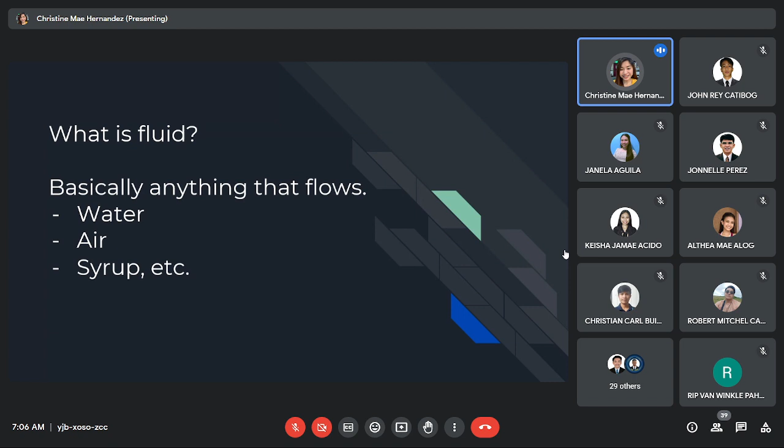Okay, so let's start with the basics before we jump to pumps. So we need to know what fluids really are. So what is fluid again? Basically, anything that flows - water, air, syrup, etc. Or it can be air mixtures. So a fluid is liquid or gas or other material that flows or continuously deforms under a shear or tangential force. So it is divided into liquid and gases.

Liquid is hard to compress as it follows the shape of its container with an upper free surface. But gas is easy to compress as it allows to expand to fill its container where there is no free surface. So fluids are also used to reduce friction.

So in Bernoulli's equation, we have friction head loss, so fluids reduce the friction too. So the study of fluid that is in motion is called fluid dynamics, and fluid at rest is called fluid static. So in order to completely study fluids in motion or at rest, one needs to study various basic concepts or fluid properties.

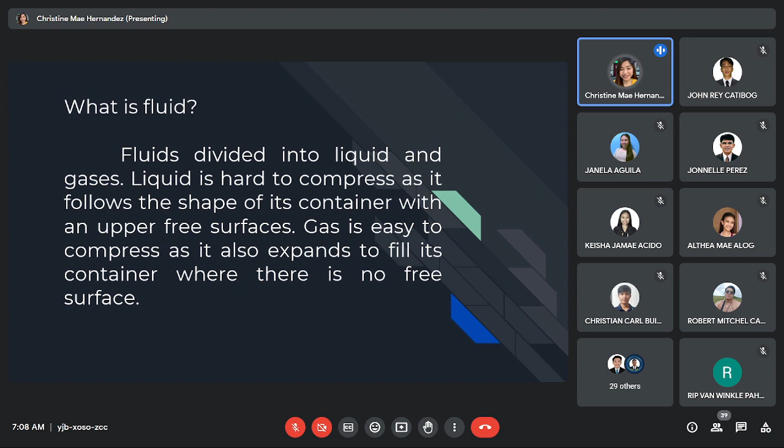So this is what we'll discuss first before we jump to pumps or fluid machineries. So characteristics of fluids can be compressibility, density, pressure, buoyancy, and viscosity.

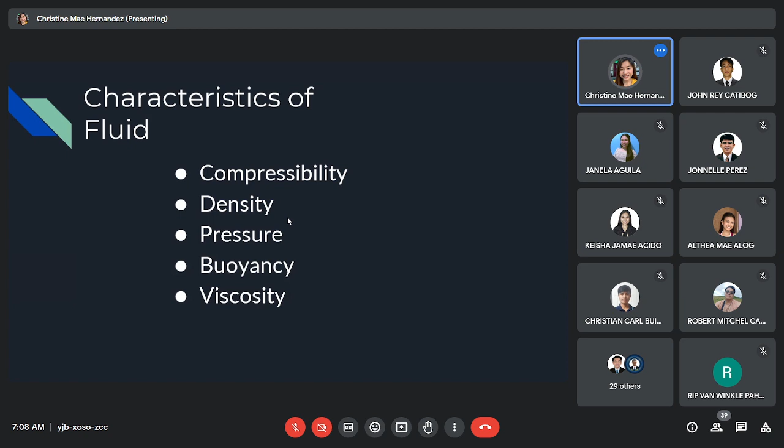So compressibility - applying pressure to a fluid in order to put greater mass into a smaller container. So gases and liquids vary in this characteristic. Gas is more compressible than liquid. So some liquids are considered incompressible.

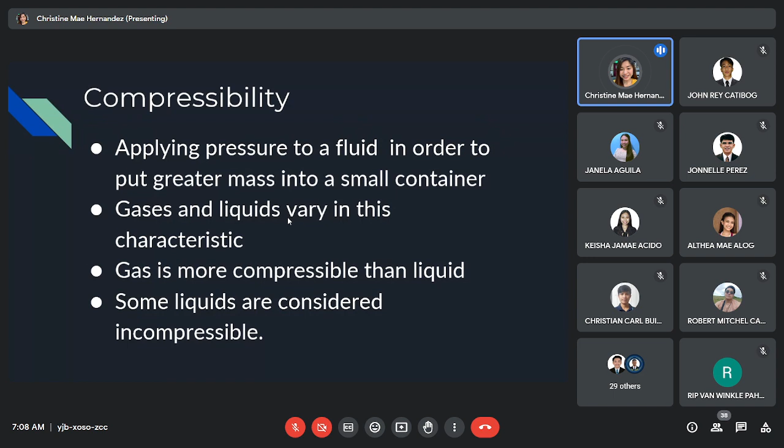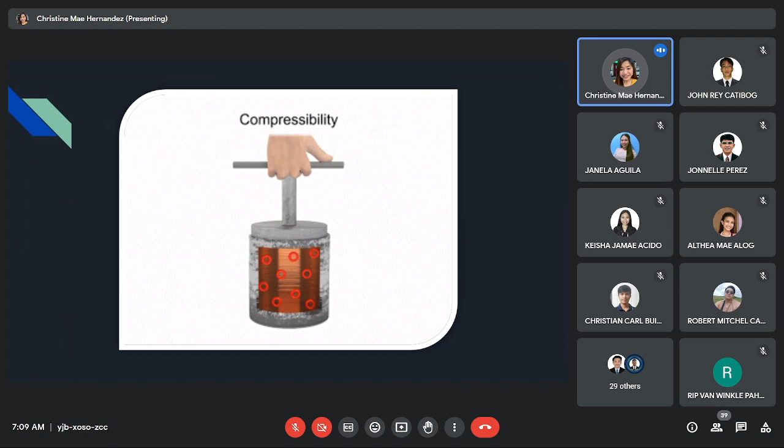So compressibility gives an idea of how a fluid volume changes when subjected to a change in pressure or external force. So this is the example or GIF of compressibility. You can see the fluid particles - at first they are far apart. Then once you put an external force, the fluid becomes compressed. So in simple words, compressibility is the measure of change in the volume of fluid under the effect of force or pressure or stress.

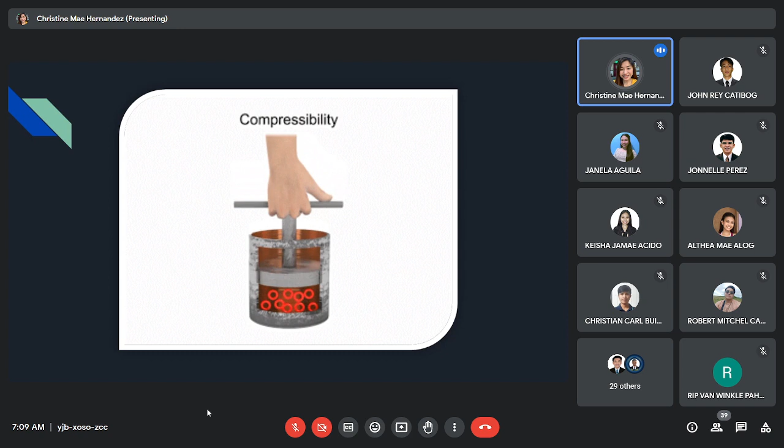So next one is density. Density is a very common and important property of matter. For a liquid, density is defined as mass contained in a unit volume. The more precise name for density is volumetric mass density. So here, the terms for density can differ.

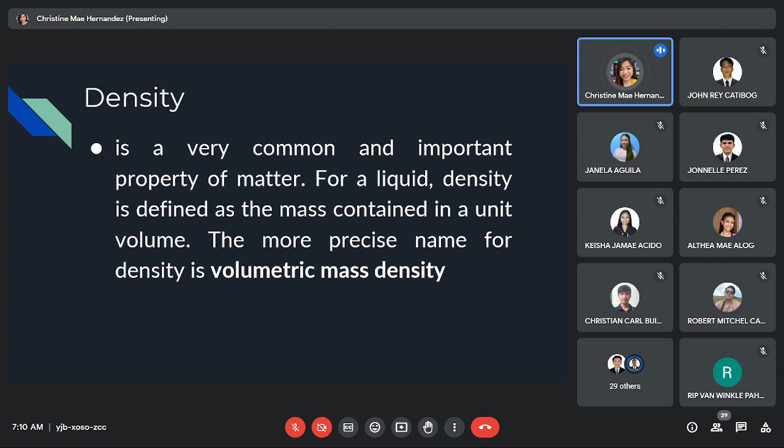So for SI unit, don't get confused. For SI unit it's kilogram per cubic meter, and for English unit it's slug per cubic feet. So are you okay with the conversions, SI or English units, or are you having a hard time with those?

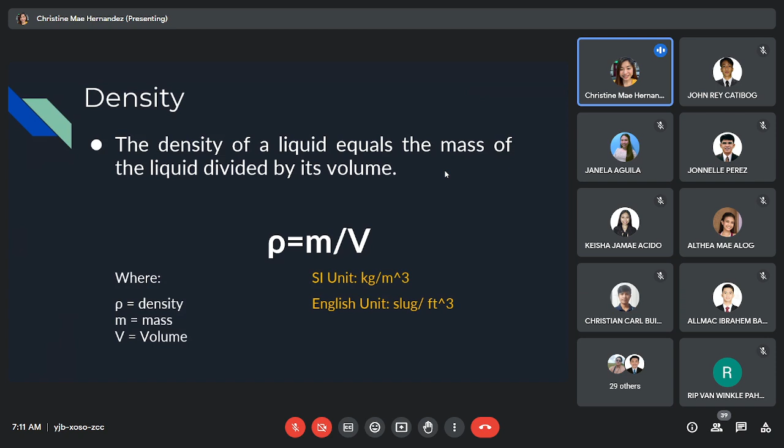Next, pressure. Fluid pressure is a measurement of the force per unit area on an object in the fluid or on the surface of a closed container. This pressure can be caused by gravity, acceleration, or by forces outside a closed container. Since a fluid has no definite shape, its pressure applies in all directions.

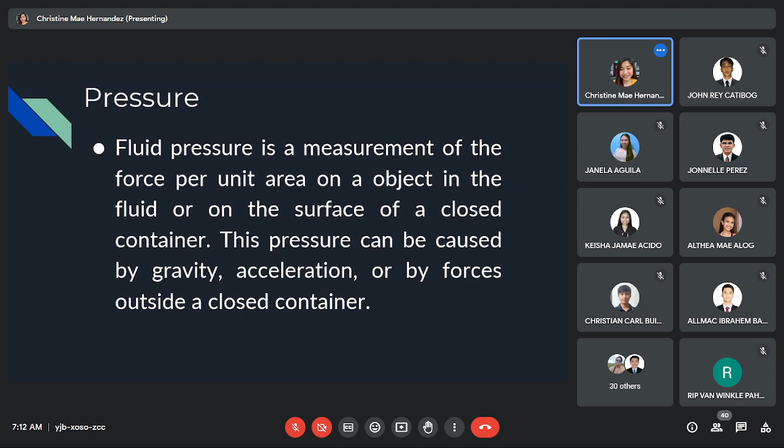So later we'll prove Pascal's law - whether it's true that pressure is equal in all directions. So fluid pressure can also be amplified through hydraulic mechanisms and change in the velocity of the fluid. Pressure is defined as force divided by the area on which the force is pushing. So the basic formula is pressure equals force over area.

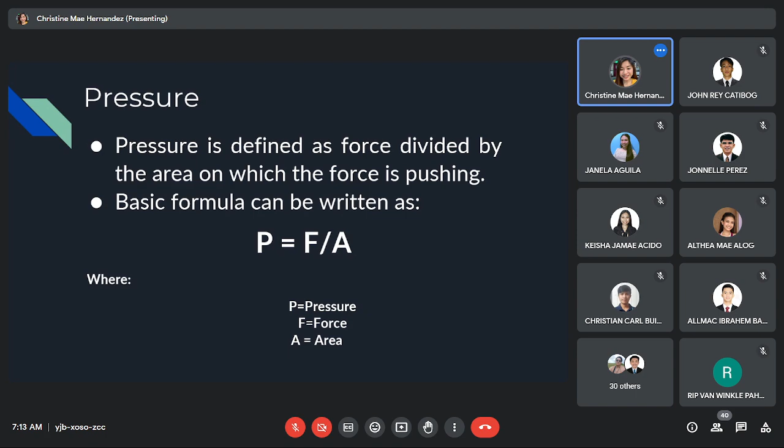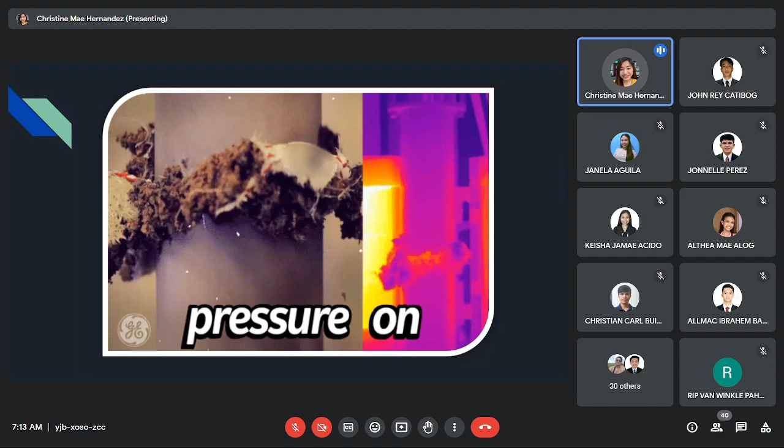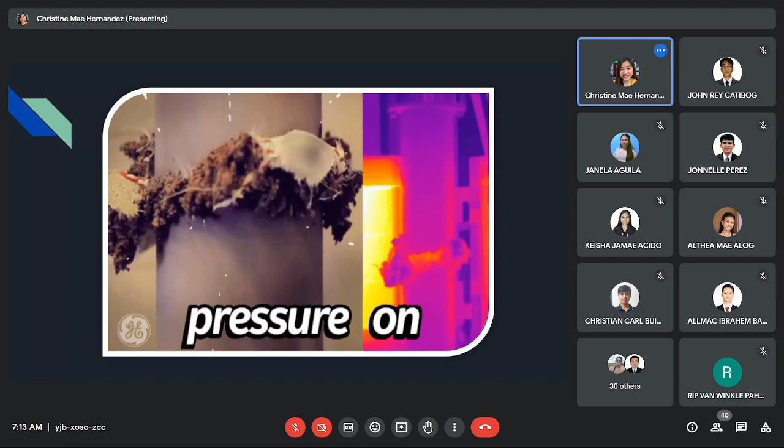So regarding pressure, when you go swimming, the pressure is higher at the bottom of the pool or the ocean than at the water surface. That's why our ears hurt, our heads, and your head feels like it's about to explode, because the deeper you go, the more fluid there is above you with its weight pressing you down.

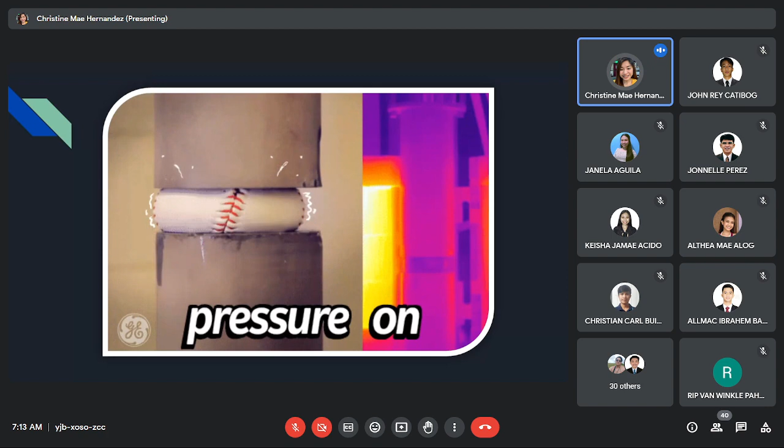A manometer is a device used to measure pressure. A common and simple manometer consists of a U-shaped tube of glass filled with some liquid. The typical liquid used is mercury, because of its high density.

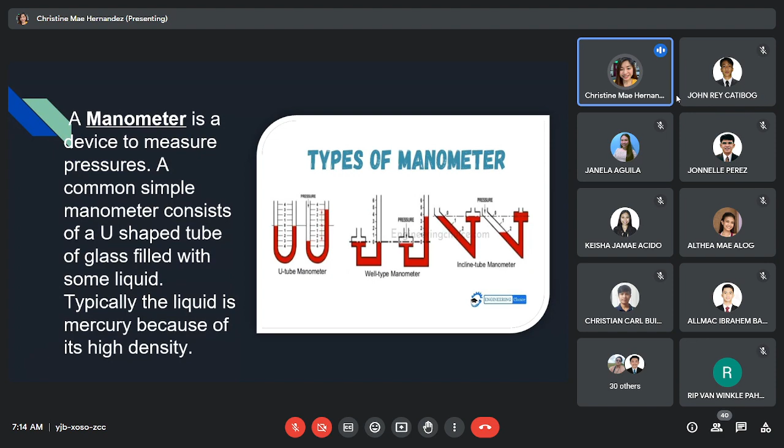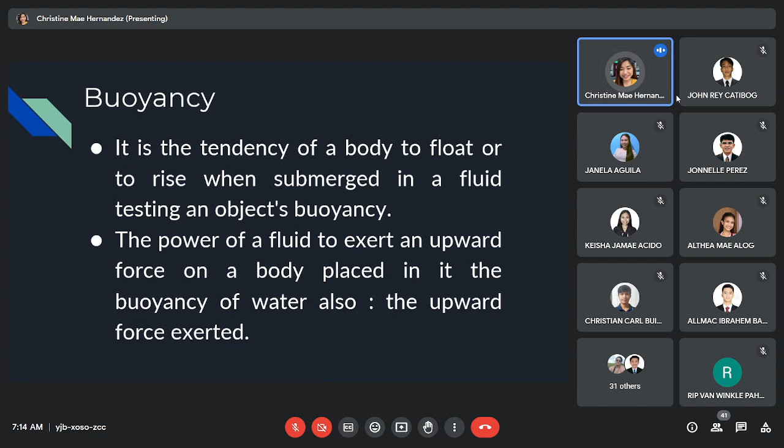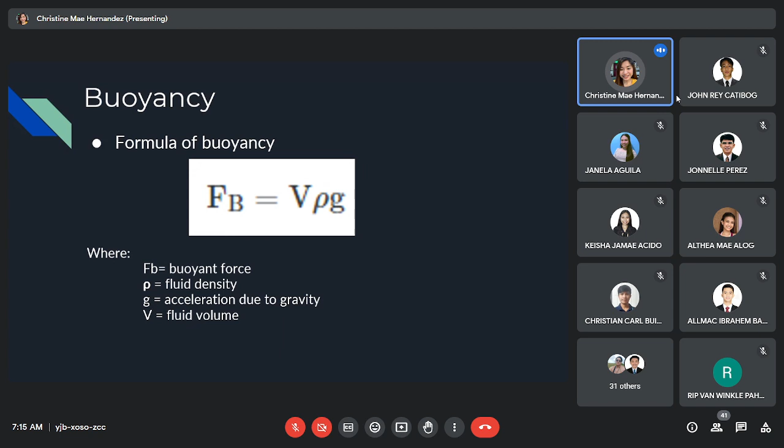The formula for buoyancy: FB, or buoyant force, is equal to fluid volume times the fluid density times the gravitational acceleration. An example of buoyancy is the ship. Have you ever looked at a giant ship and wondered how such a heavy object made of steel floats in water?

For a ship to float, it must have lower density than water, right? At first sight this might not make sense, as the steel that ships are made of is not exactly known for its low density. So the thing is, the density of an object results from the relationship between its total volume and its weight.

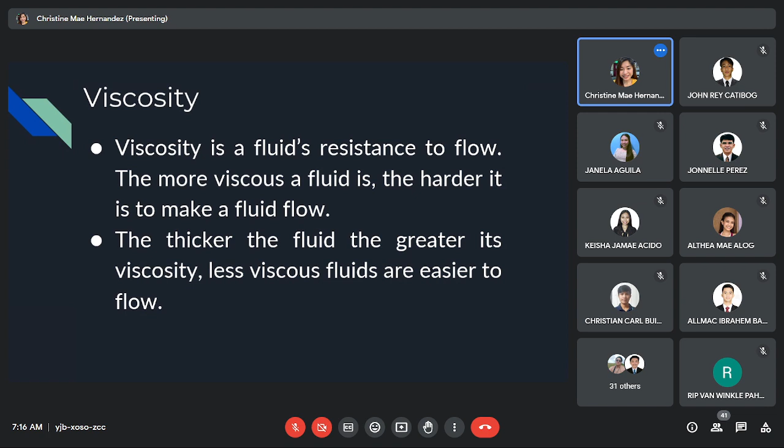The formula for viscosity: viscosity is equal to shear stress over shear strain, or we can also say it's the rate of shear deformation or the velocity gradient.

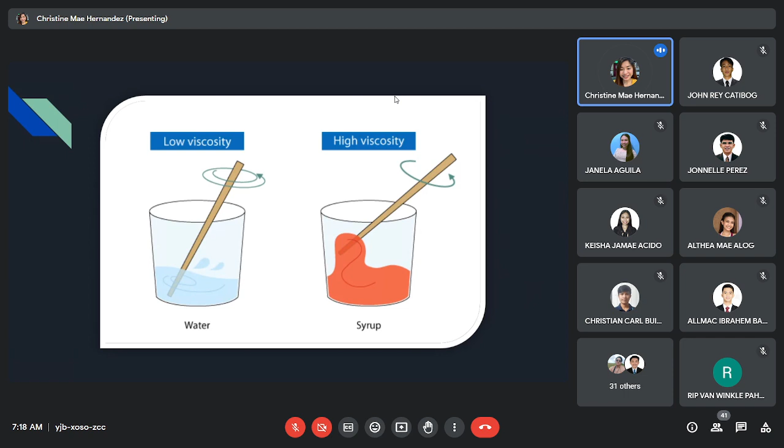It's similar with ketchup. Low viscosity means more flow, while high viscosity means less flow.

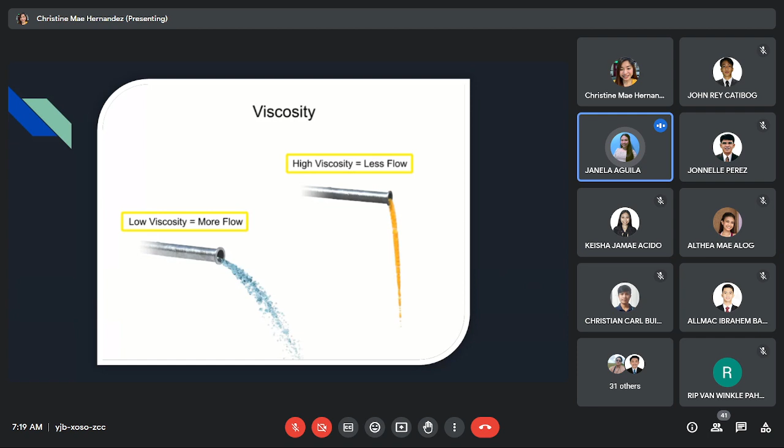So that's how high viscosity equals less flow. Did you understand the characteristics of fluids, or are there any questions or clarifications? It's clear. Okay, so next.

Types of fluids: the ideal fluid. An ideal fluid is incompressible and it is an imaginary fluid that doesn't exist in reality. Also, it doesn't have viscosity.

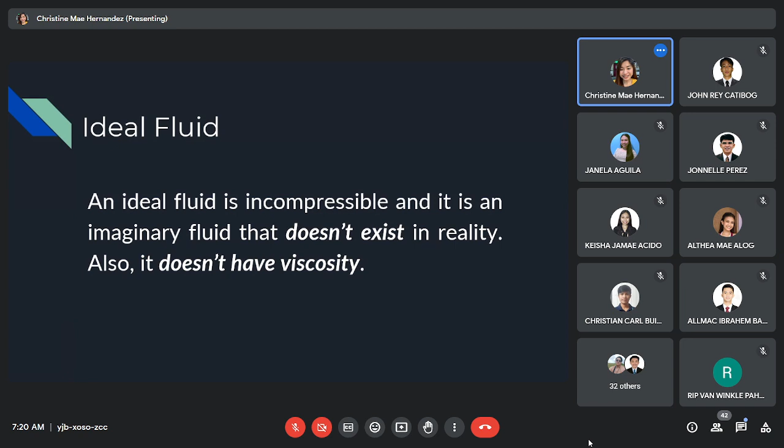A fluid which possesses at least some viscosity is termed a real fluid. Actually, all fluids existing or present in the environment are called real fluids. Some examples are petrol, air, and so on.

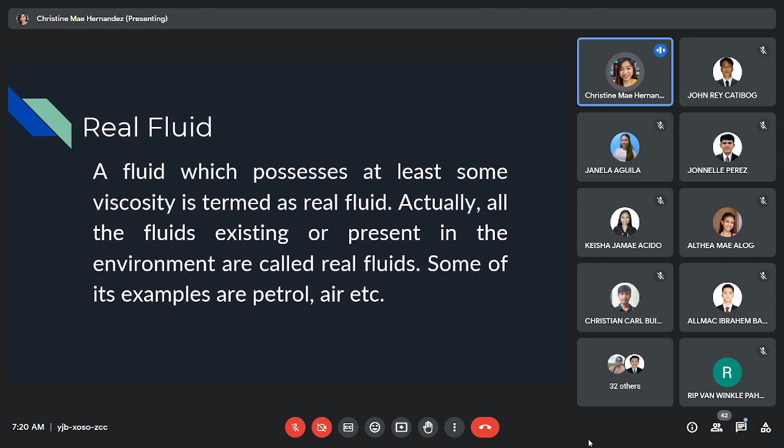Newtonian fluid is the fluid whose viscosity remains constant. So when the viscosity is constant, it is called Newtonian fluid. These fluids are independent of the amount of shear stress applied to them with respect to time, so the relationship between viscosity and shear stress is linear. Some examples are water, air, alcohol, glycerol, and motor oil.

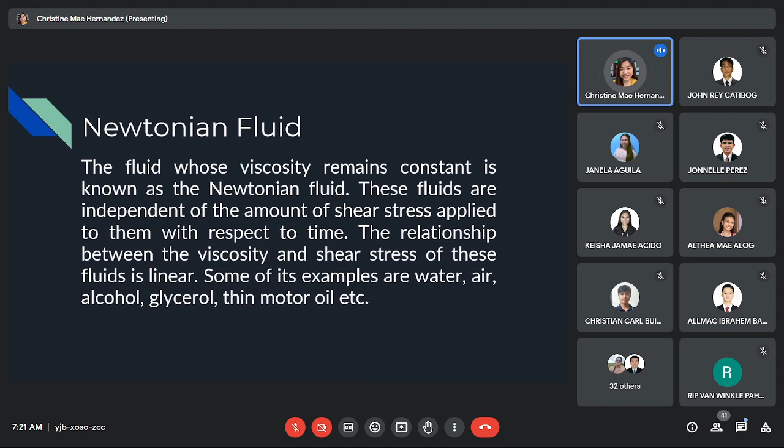Non-Newtonian fluid, if the real fluid does not obey Newton's law of viscosity, or if the shear stress is not proportional to the shear strain or velocity gradient, then it is called non-Newtonian. Some examples are blood, saliva, soap solution, cosmetics, syrup, honey, and etc.

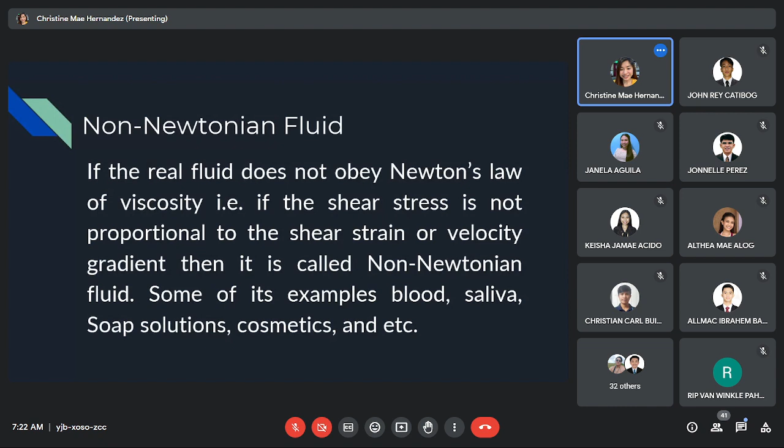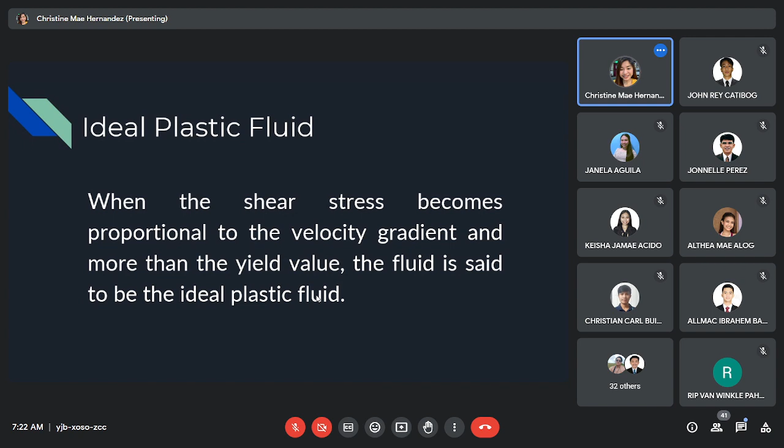Ideal plastic fluid: when shear stress becomes proportional to velocity gradient and more than the yield value, the fluid is said to be ideal plastic fluid - when it rises above or more than our yield value.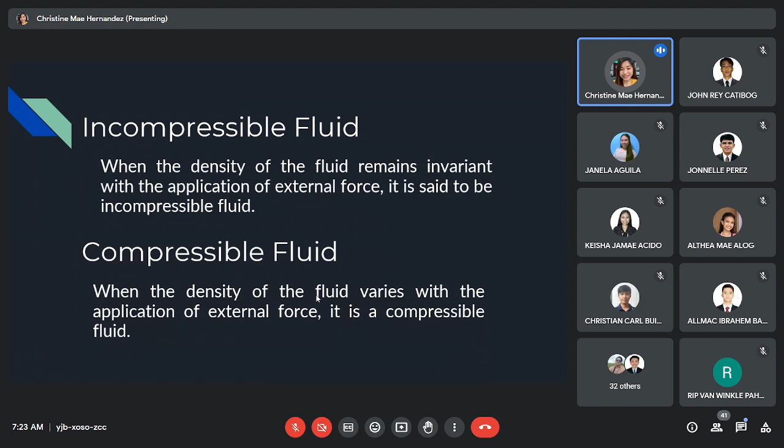Last, incompressible fluid: when the density of the fluid remains invariant with the application of external force, it is said to be incompressible fluid. Next is compressible fluid: when the density of the fluid varies with the application of external force, it is a compressible fluid.

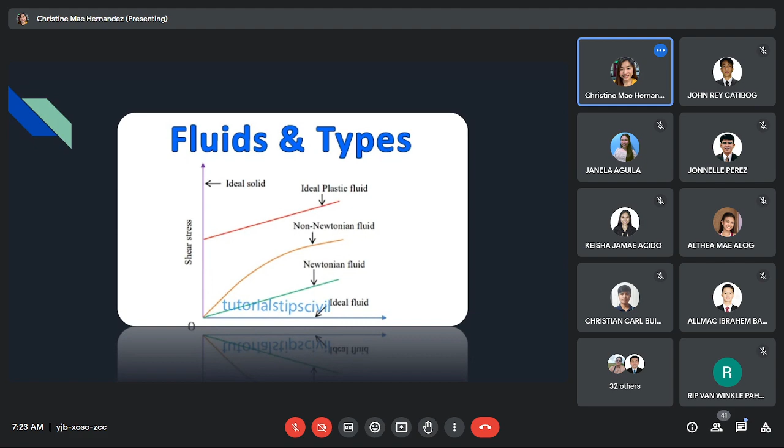Okay, so any questions or clarifications regarding types of fluids and characteristics of fluids? Wala pa naman po. Okay, so wala pa naman. Wait lang ha, ano ba to? Sige, mamaya natin i-prove yung Pascal para tuloy-tuloy tayo.

Next naman ay properties of fluids. Ano ba to? Your entire screen na lang.

So, kaklase niyo ba to? Si John Peter? Mama. Yes po. Okay.

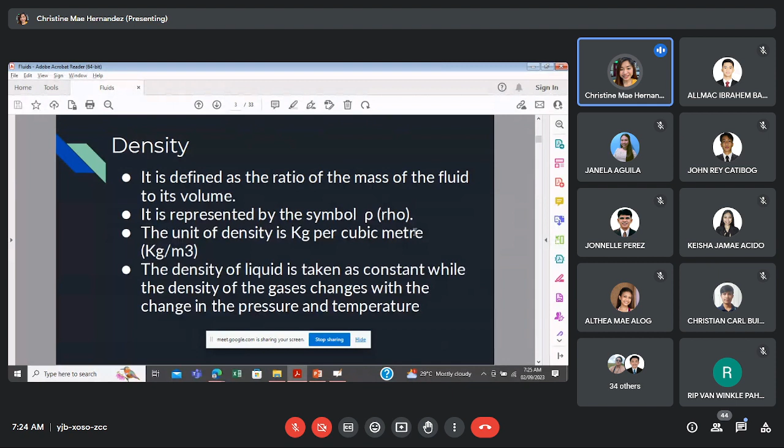So, next one is properties of fluids: density, specific weight, specific gravity, specific volume, viscosity. Density, like earlier, is defined as the ratio of the mass of the fluid to its volume. I won't repeat this since I already mentioned it in characteristics of fluid.

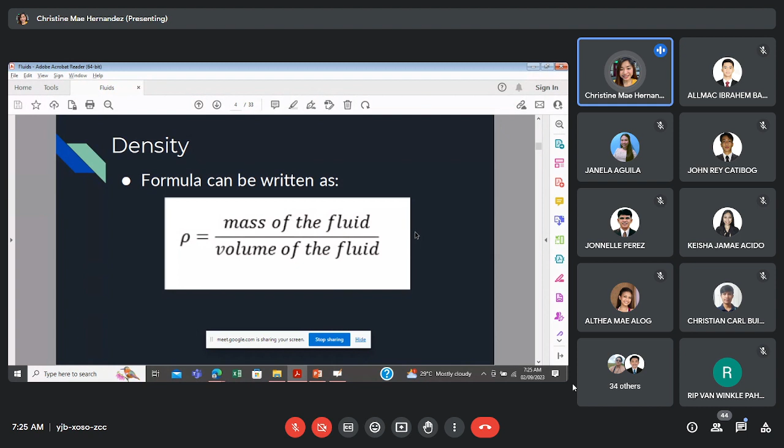There's the formula. Specific weight: when the ratio of the weight of the fluid to the volume of the fluid is called specific weight or weight density. This is what I was telling you, that the terms for density differ. The earlier density is called volumetric mass density, while specific weight is called weight density.

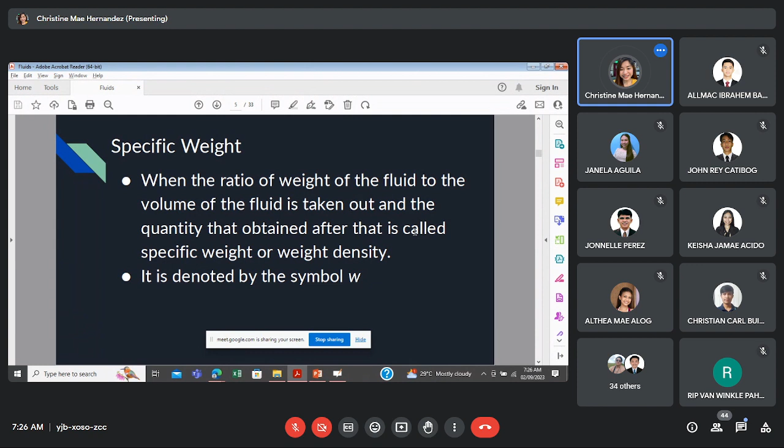Specific weight - these are the formulas for specific weight: weight of the fluid over volume of the fluid. Since weight is mass times gravitational acceleration, that's why it's written this way. So these are the different formulas for specific weight or the weight density.

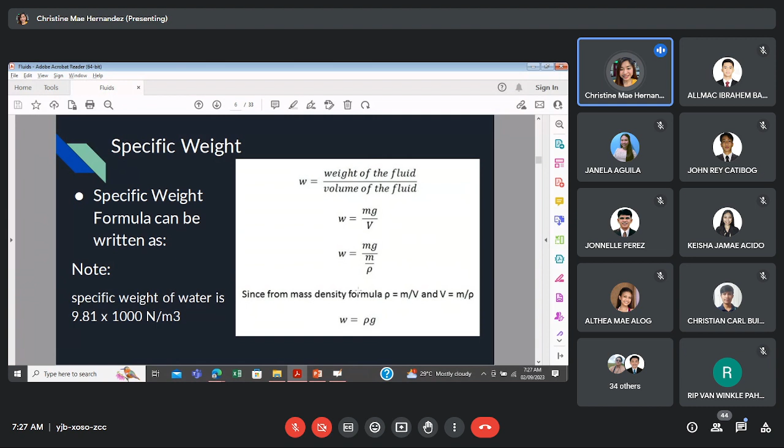Next is specific gravity. It is the ratio of weight density of a fluid to the weight density of a standard fluid, or it can also be density or volumetric mass density over the volumetric mass density of a standard fluid. Specific gravity is also known as relative density. So they're different - volumetric mass density, weight density, and relative density are all different.

Water is taken as the standard fluid for liquid, or that's its denominator - the weight density of the fluid to the weight density of the standard fluid.

If water or liquid is your fluid, say motor oil is given, whatever density is given for the standard fluid, whether weight density or volumetric mass density, that's what you use for the standard fluid too. You divide it. If it's liquid, water is our standard fluid. For gases, air is our standard fluid.

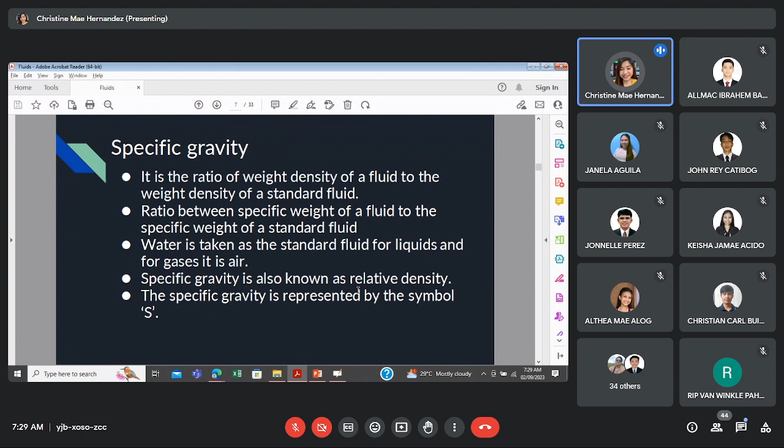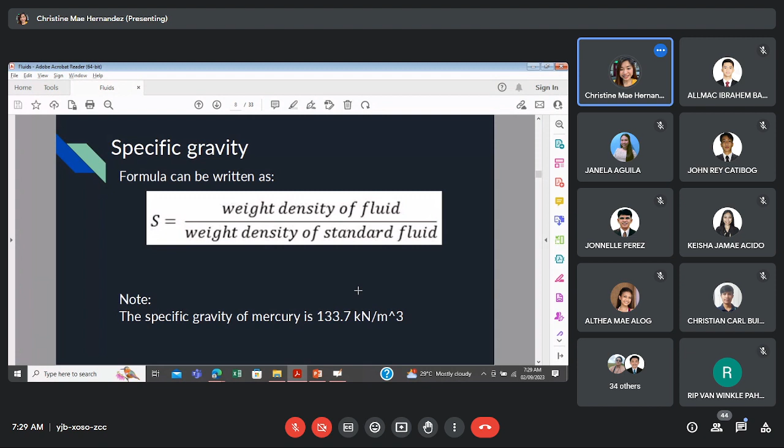Dito, ang ating specific gravity daw is weight density of the fluid over the weight density of the standard fluid. Ang akin, di siya S, ang ginagawa ko SG siya. Specific gravity, pwede din siya maging volumetric mass density of fluid over the volumetric mass density of the standard fluid. Yung standard fluid, it's either water or air, depende sa fluid mismo na ginamit sa problem.

Okay, specific volume. So it is a volume occupied by a unit mass. Formula for specific volume is volume of the fluid over the mass of the fluid. Or ito ay kabaliktaran ng density, diba?

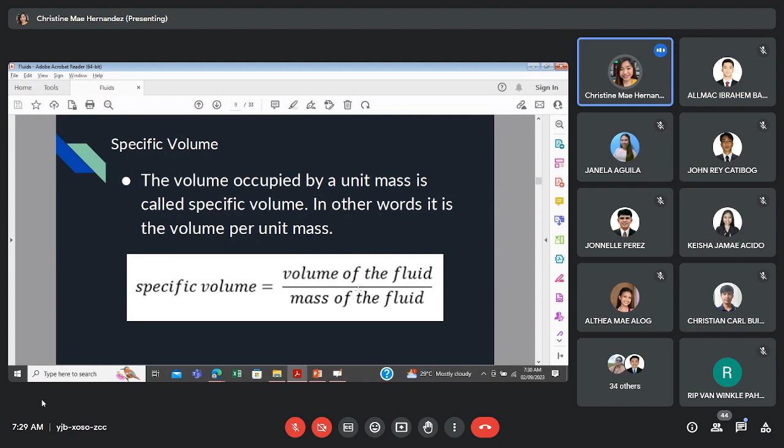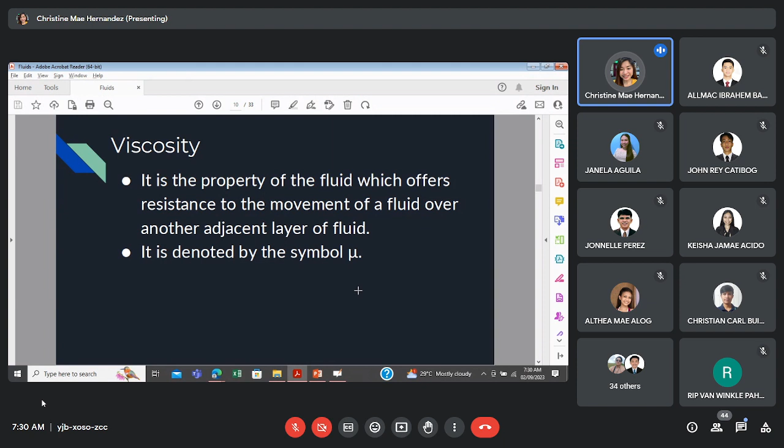Reciprocal of density. So, viscosity. It is the property of fluid which offers the resistance to the movement of a fluid over another adjacent layer of fluid. Na-discuss ko na din kanina to. Ayan, formula ulit.

Okay, other fluid properties. So temperature is the fluid property that gives the measure of hotness or coolness of a fluid, or measure of heat intensity of a fluid. So ang device na ginagamit natin used to measure temperature is called thermometer. Dapat si thermometer are calibrated, dapat naka-calibrate.

The next one, si pressure. So fluid pressure is most often the compressive stress at some point within a fluid. Fluid pressure occurs in two situations. Pag sinabing open condition, nasa open channel flow yan, for example, ocean, swimming pool, or basta exposed siya sa atmospheric pressure. Pag sinabi namang closed condition, nasa water line, pipeline, gas line, basta nasa closed system siya. Okay, hindi siya open sa atmosphere.

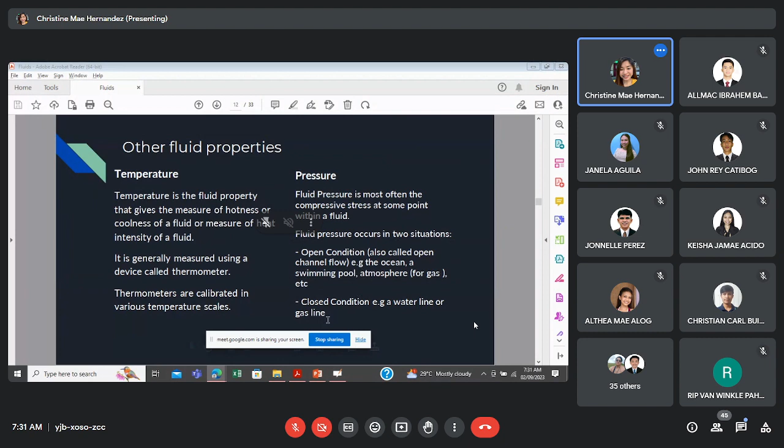Okay, so bago natin ituloy yung fluid properties, wait lang. I-prove muna natin ang Pascal's law. Saglit lang guys ha. Okay, so nakikita ba yung screen ko? Yes po, ma'am.

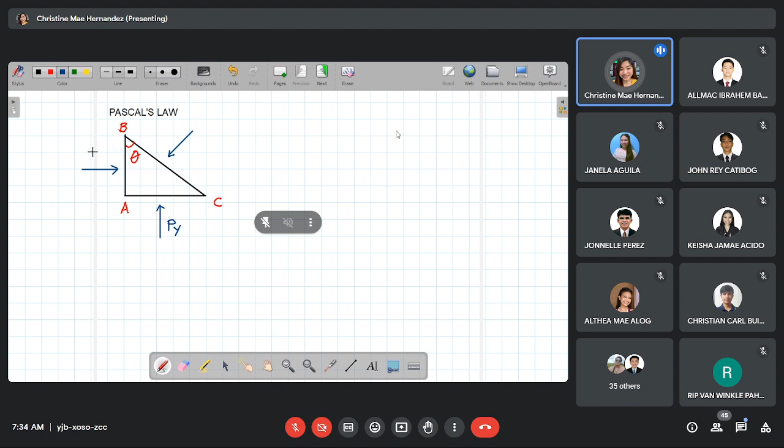Okay, may angle theta ako dito. Meron akong point A, point B, and point C. Dito sa ating right triangle, meron po akong nilagay na force. Gagawan ko muna ito ng, may in-exert ako dito, force. Gagawan ko muna ng mga arrow. Okay, dito, may in-exert ako na force na pressure PY. Dito, meron akong in-exert na force na PX or pressure X. And dito, meron akong PZ.

Okay, so since ito ay meron tayong angle dito, ito is, yan, theta din to, di ba? Okay? So sabihin natin ang AB, meron po akong length na dy. Itong dy ay length ha, length. Yan. And itong AC, meron akong length na dx. And itong BC, meron akong length na dz.

Yan. So itong nandito, ito yung gagamitin natin sa pag-prove ng Pascal's law, where pressure is equal daw in all direction, in x direction, in y direction, and in z direction. Ngayon, we will assume that ang thickness natin ay equal sa 1 ha. Ang thickness natin ng triangle na to ay equal sa 1. Kasi kanina meron tayong length and meron tayong pressure or yung force na PZ, PY, and PX. So yung mga length natin, dy, dz, and dx.

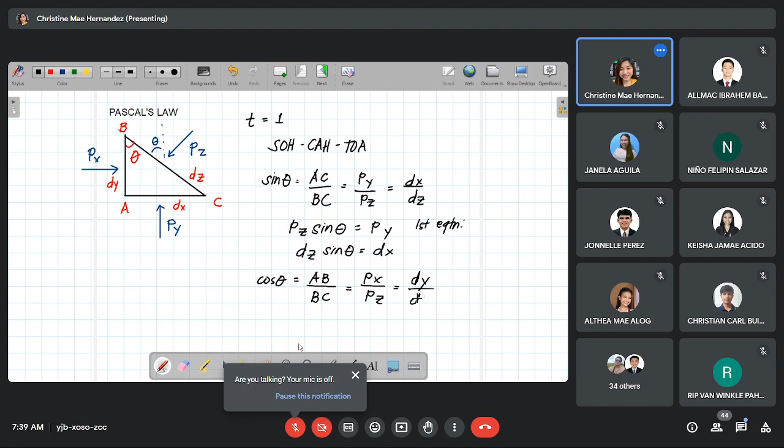Next naman, cosine. Gamit ang... so cosine theta is equal to adjacent. So length AB over the hypotenuse BC is equal to, ano ba yung length nung line AB? So PX over PZ. And yung ating, so ito force din, ito length pala, sorry, DY. Tama ba? AB, DY over DZ.

And we will rearrange yung ating cosine theta. So PZ cosine theta equals PX. Then DZ cosine theta is equal to dy. Next naman, tangent or TOA.

So, tangent theta is equal to opposite, which is AC over AB. So for the pressure or the forces, PY over PX is equal to dx over dy.

So this is our second equation. Px tangent theta is equal to Py, or dy tangent theta is equal to dx. So this is our third equation.

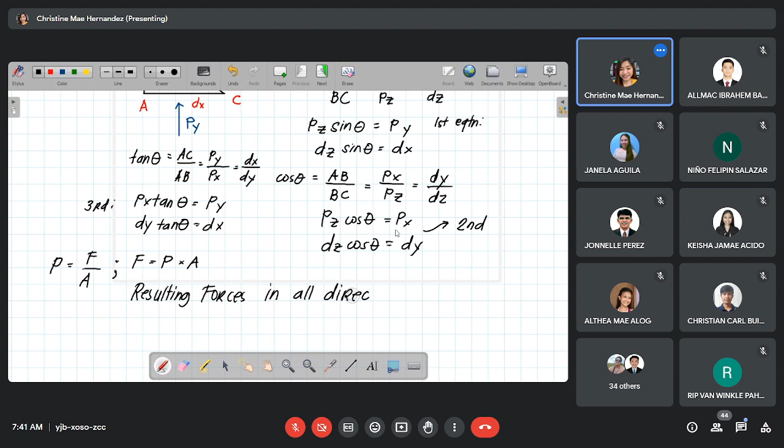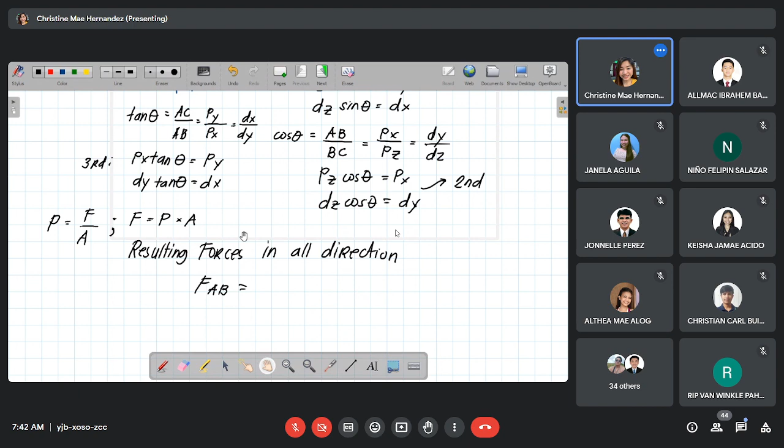So if we look for force AB, using this formula, pressure at AB, so we have PX times area, which is length times thickness. We have length dy, times thickness of 1, assuming the thickness is 1. So we have force AB equals PX dy.

And for force BC, we have pressure PZ times area, which is dz. Is that right? Where is BC? Here it is. So dz times cosine theta times 1.

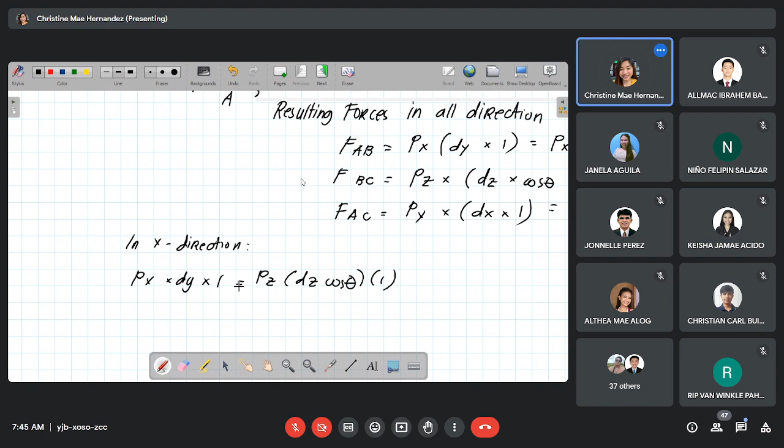So we have PX times dy times 1 is equal to PZ dz cosine theta times 1. So PX, like a force - force AB is equal to force BC. Force AB is equal to force BC. So PX dy, this one, and BC, PZ times dz cosine theta. Then PX dy is equal to PZ dz cosine theta.

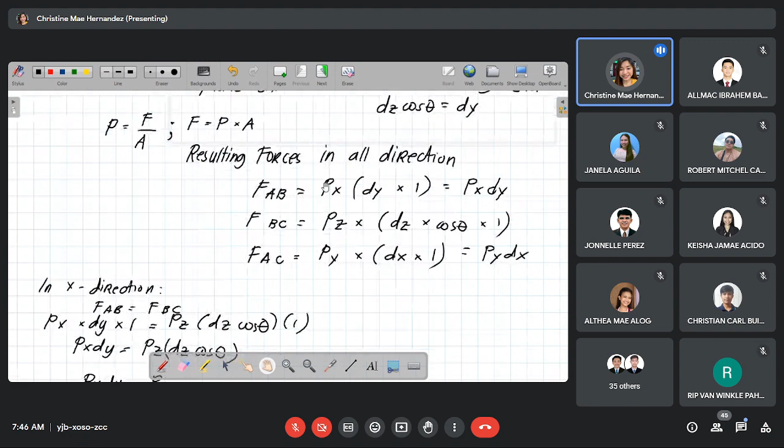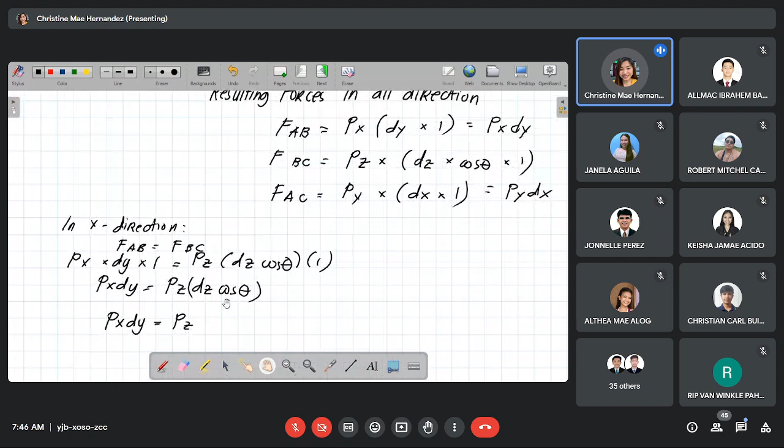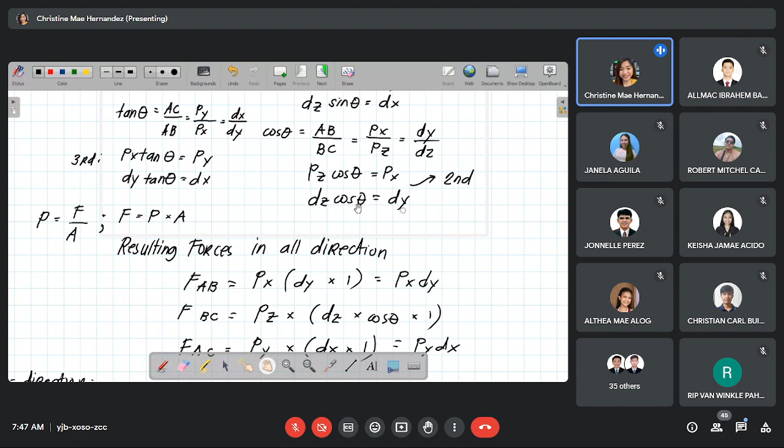So PX dy is equal to PZ dz cosine theta. Now what is this dz cosine theta? Let's go back to our first equation, the very first one. We have the first equation in terms of pressure and in terms of length dz. So if we say dz cosine theta, what is that? It's from the second equation we got - dz cosine theta equals dy. So dz cosine theta is dy. So we cancel dy, since it's a common term, and what's left is PX is equal to PZ.

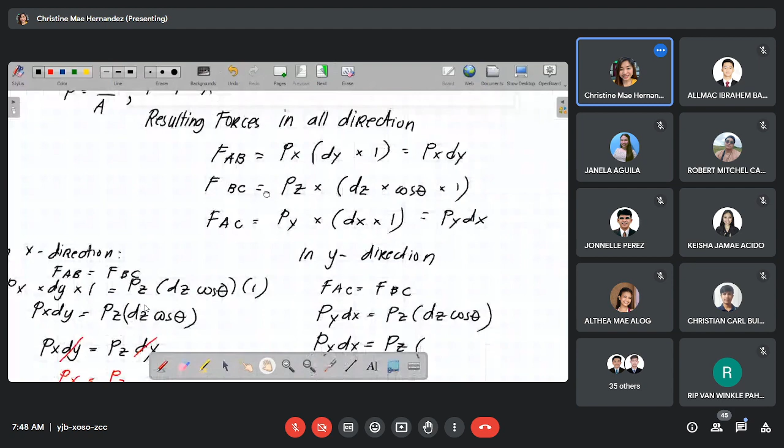So we've gotten these resulting forces. Force AC, PY dx is equal to PZ dz cosine theta. So PY dx is equal to PZ dz cosine theta. Wait, what's this dz cosine theta again?